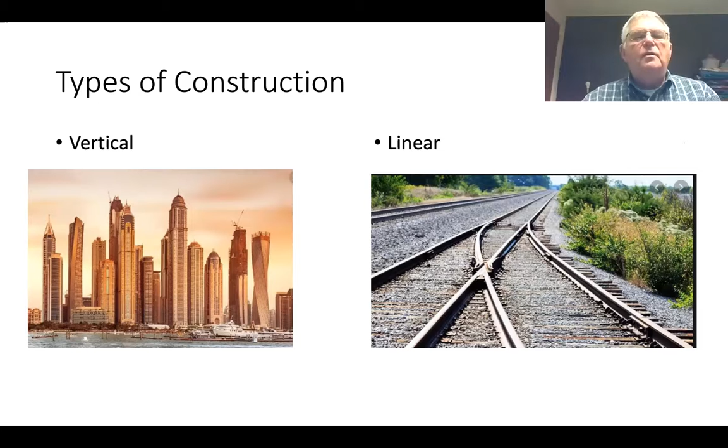You can basically divide the types of construction into two different categories. Vertical construction, which buildings are an example, and this is a slide, I think, from Kuwait, one of the places in the Middle East, and linear: roads, railroads, that sort of thing that go horizontal. So vertical and linear. Let's go into some examples. This is a very unusual bridge, and it's mostly what you would classify as linear construction.

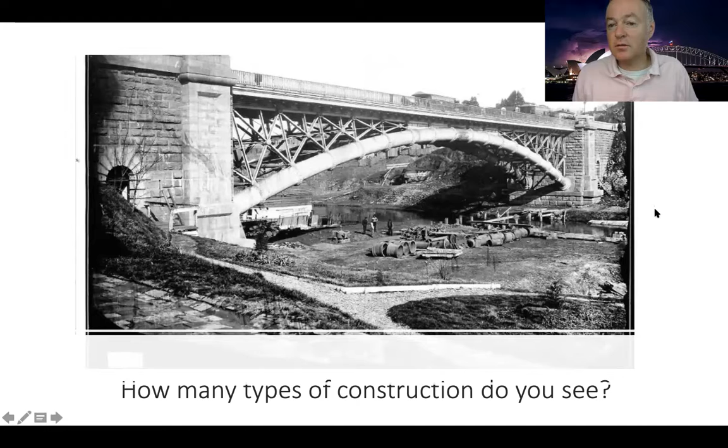It's quite an interesting structure. So anyway, this is a good example of linear construction. The bridge, the pipeline, the roadway on the bridge would kind of typify that kind of work. So Bill, another way to think of linear might be horizontal. Yeah, horizontal, linear, as opposed to vertical. Right. Yep. Okay. Very good. Okay, next one.

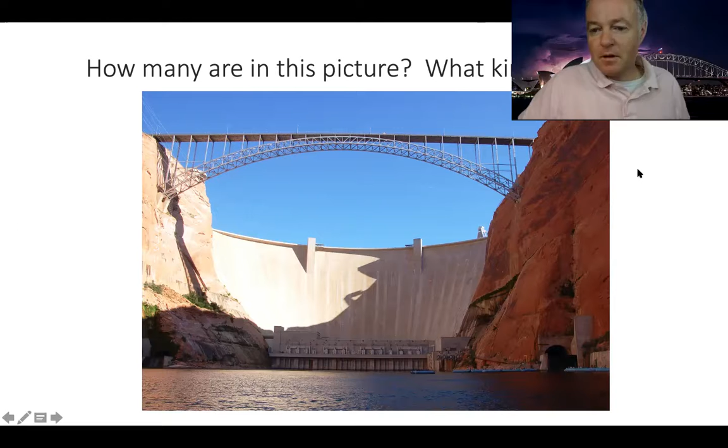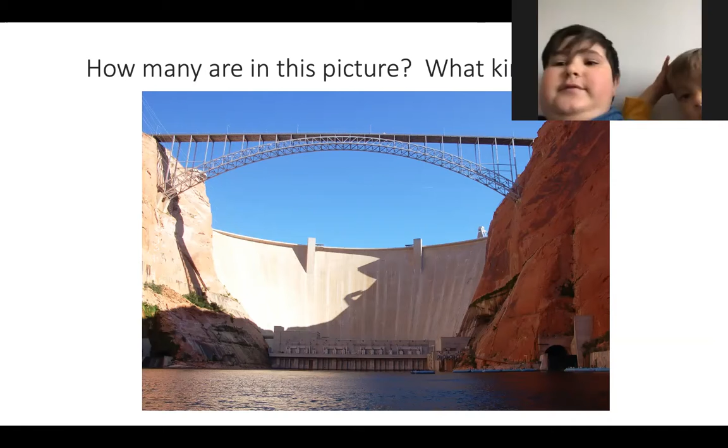I'm guessing that the aqueduct or whatever it's called across is lineal, and then the dam is up. I forget what that's called. Vertical. That's vertical. Yeah. Very good. The roadway up on top, is that vertical or linear? That looks vertical to me. Well, the roadway is going horizontal, right? Yeah. And the dam is going up and down.

Down in the lower right corner, you can barely see it in the shadow. There's a tunnel. I see it. Yeah. And would that be linear or vertical? Vertical. I think it's linear because it goes parallel to the ground, okay? The tunnel is actually an emergency spillway. If the water level gets too high on the dam, they don't want all of the water spilling over the top of the dam. And so there's like a valve, a big sluice gate that will release the water and it'll come pouring out of that tunnel.

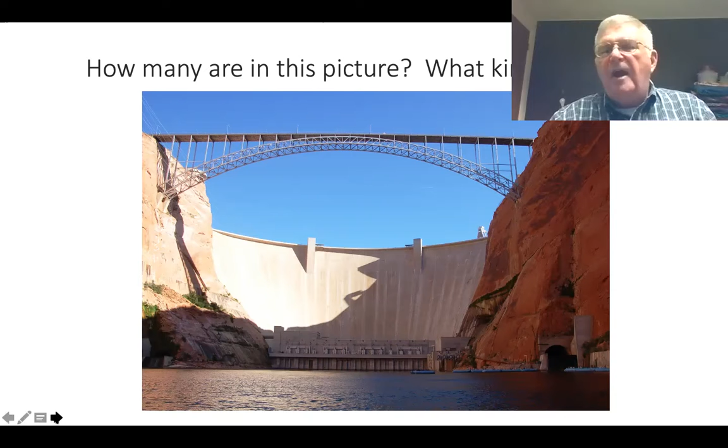So I imagine if you're in a rubber raft going down the Colorado River like we were, that would give you quite a ride. Okay, on to other stuff.

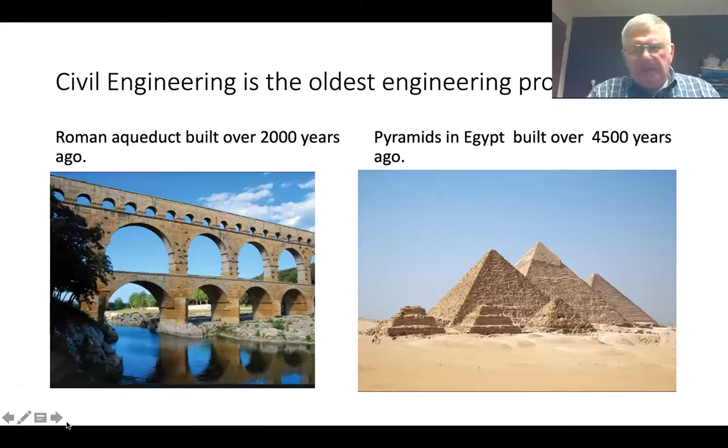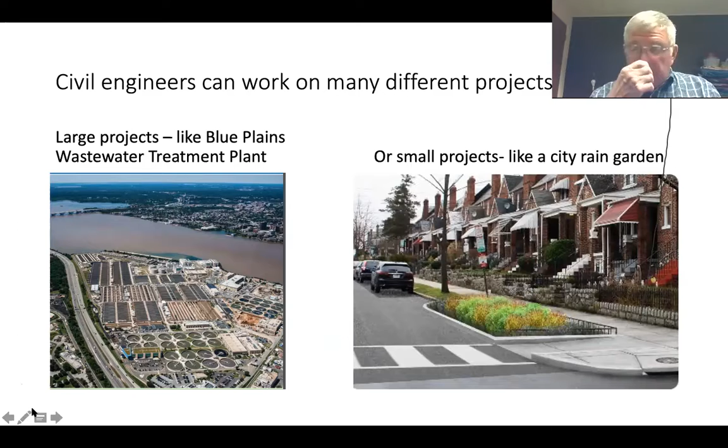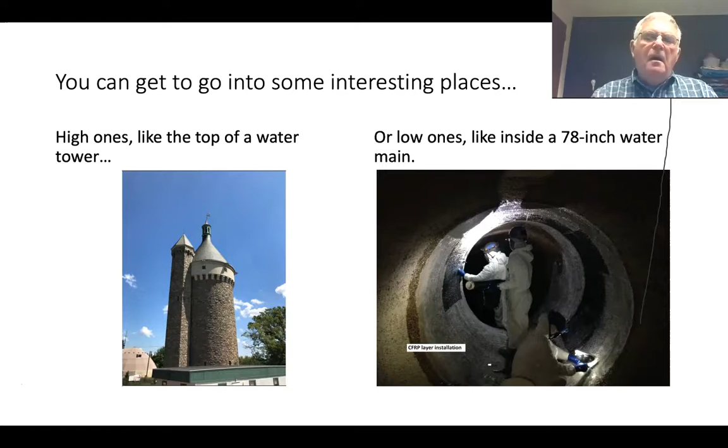Bill, I think Scott has a question. Yeah, what's up? So what was your favorite project that you were ever involved with? I think probably we'll be looking at one of them that was pretty interesting. I've got a couple of examples of what I've been doing, but one involved a radio tower, and the other one involved a pipeline crossing the Potomac River on a bridge, and we'll get to that toward the end.

Okay, we've got to take our work very seriously. Back in 1750 BC, about 3,750 years ago, there was a Babylonian king, I think he was in Assyria, and his name was Hammurabi. He came up with a bunch of laws to govern his kingdom, and one of the laws had to do with engineering. What he said was that if a builder builds a house for someone and does not construct it properly, and the house which he built falls in and kills the owner, then the builder shall be put to death.

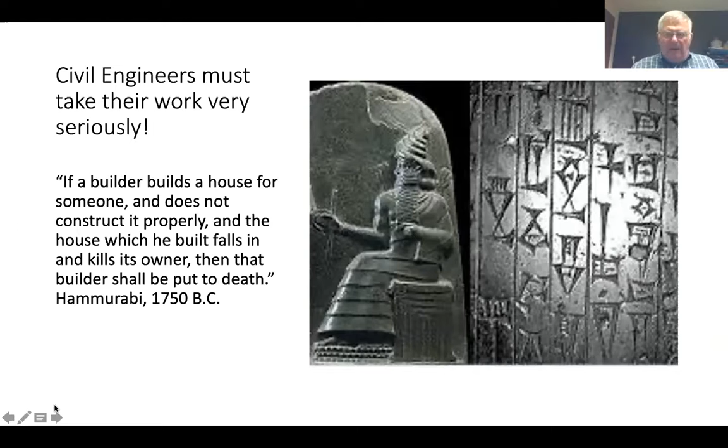Okay, alright. How did I get involved with civil engineering? What did I do? Why did I want to become one? This goes back to my dad and my grandfather, and these were all guys that were carpenters. I am about the first in 5 generations that was not a carpenter. But I was always interested in construction, and I've always been around construction.

Back when I was, I guess, probably my first year in college, during my semester break, I helped my dad build a house. It was in the middle of winter. It was freezing. I was up in the Boston area, and the lumber for the house had come down from Canada, and the lumber was all frozen.

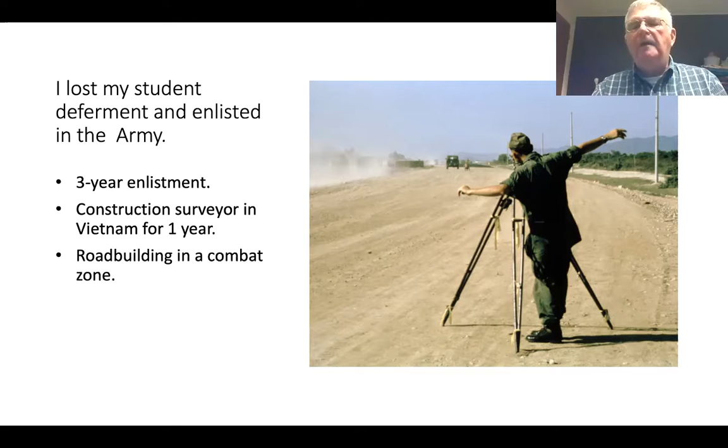I was in Vietnam for a little over a year. This guy waving his arms isn't me, but that's a typical construction surveyor on QL1, the main coastal highway in Vietnam, which we were rebuilding. That was the road I worked on. Like I say, it's not me, but it was one of my guys.

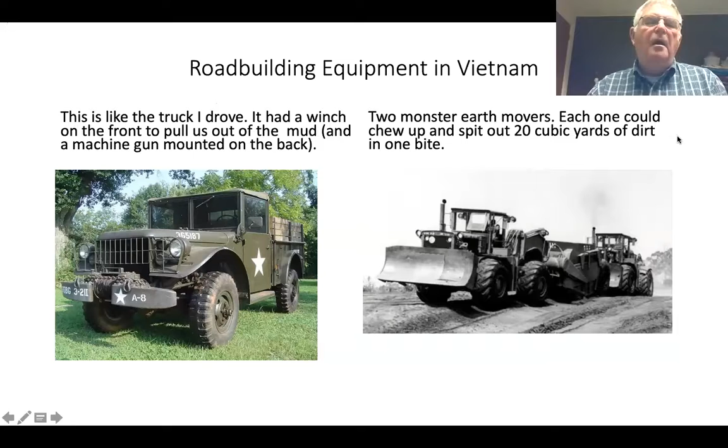These are some of the vehicles we had in Vietnam. The left-hand side is an M37, what they call the weapons carrier. It's a 3/4 ton, 4x4 truck with a 100 horsepower engine, and it had a winch on the front - you can see it in the front bumper. If you got stuck in the mud, it had a cable you could wrap around a tree and pull yourself out with the winch.

For a time, we also had a machine gun in the back of the truck. That was for the fellow that I replaced when I arrived in Vietnam. He had been riding in a truck like this when it was hit by a B-40 rocket, which blew the truck up - he was horribly injured and sent back to the States. Another fellow riding in the truck was shot in the wrist, was treated in the local hospital, and came back working for me on the road. So we had a machine gun mounted on the back of the truck just for our protection. We never had to fire that machine gun in anger at anyone, so that was good.

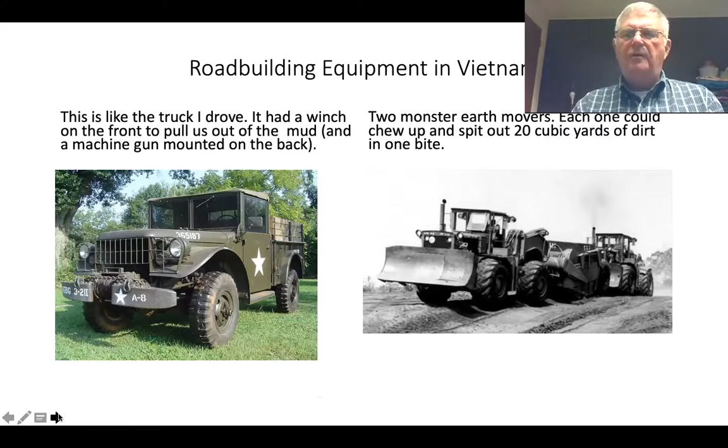Anyway, we finished the road. I came home, served another year in the Army, and then went to school again. This time I was able to get into George Washington University, and since I had credit from Wentworth, I transferred it over and took advanced calculus, physics, and hydraulics. Hydraulics is the study of fluids - water is a fluid, air is a fluid, believe it or not, along with different kinds of liquids. The reason we study them is to know how to design pipelines to carry the fluids, which is important for civil engineers.

We studied water and sewer design and soil mechanics. Well, soil mechanics, that's dirt, right? How do you think engineers use dirt? Do you have any idea?

Anyone? I might call on someone - Bill. We could call on Jailer, or who else is online here? Scott, Miles, Cyrus, anyone? Who would want to analyze dirt? Miles says gardens. Well, yeah, but soil mechanics is more physics than it is biology.

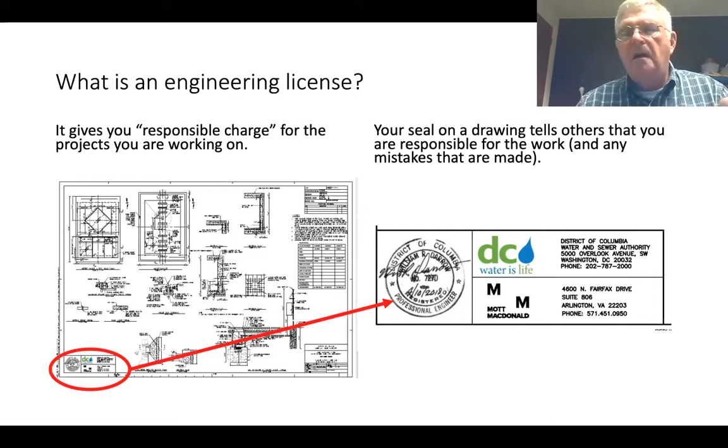With that, they give you a seal, and this is my wet seal, the thing on the right. You stamp the drawing and say, all right, everything is here, is designed well, it's okay, and you can send it out for the contractors to build.

My projects: I was an inspector on a school job. That school, I learned, has since been closed. This was like 40 years ago that school was built.

Radio towers, a 500-foot radio tower. This is Google Street View, so the picture is kind of warped. Looks like both radio towers are leaning over, but actually they are straight. Mine is the skinny one on the left, that's 500 feet high.

The contractor that put that radio tower up had to fly the top 100 feet or so in with a helicopter. That was quite a show.

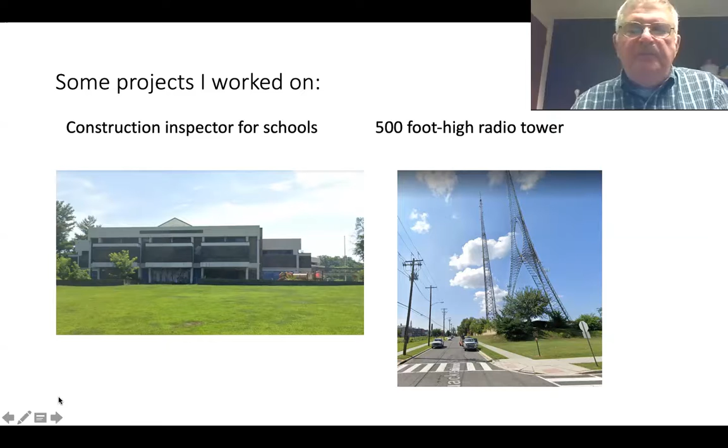It was an interesting project. It took about 3 months to put up, and it took about a week to tear it down afterwards. But anyway,

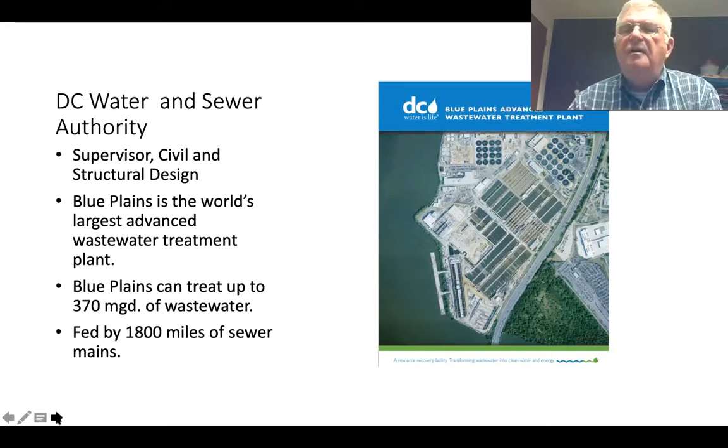But it also generates methane gas. The methane gas is used to drive steam turbines that provide electricity, and so they have a plant that produces electricity for running the wastewater treatment plant. So it's kind of an interesting renewable resource.

On the clean water side, when I came to Mott MacDonald, we are in charge of the city's drinking water system. Bryant Street pumping station is a huge pumping station, which is like the heart of the water system, literally the heart, because it's connected to all of the water pipes in the city. And so the pumping station pumps water to all of the residences and the buildings in the city.

Tank number 2 is a 1 million gallon water tank. We have to go in there and inspect it every 3 years. There's a ladder that goes through and you can go in a hatch inside. Sometimes they can't take the tank out of service, and so what they do is they launch a small submarine. And the submarine swims around in the drinking water supply, and you can get videos of the condition of the tank inside.

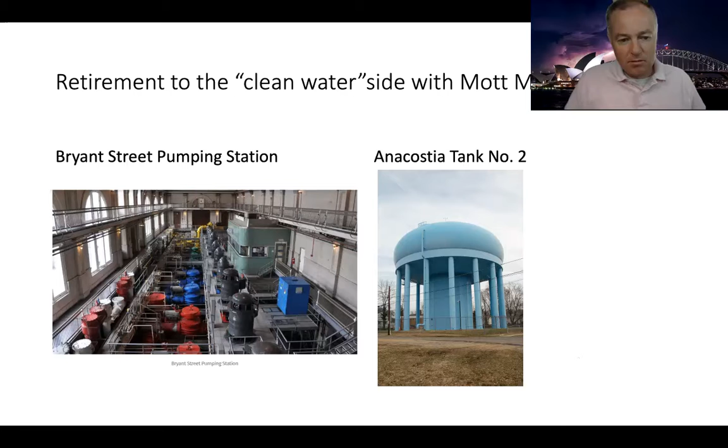Bill, a question. The red and the blue round cylinder things there, what's the big difference there? Okay, those are big electric pumps, and the city has what they call different pressure zones, and if you live at the top of a hill and the pumping station is down at the bottom of the hill, you have to pump the water up in order to get enough water pressure at the top of the hill.

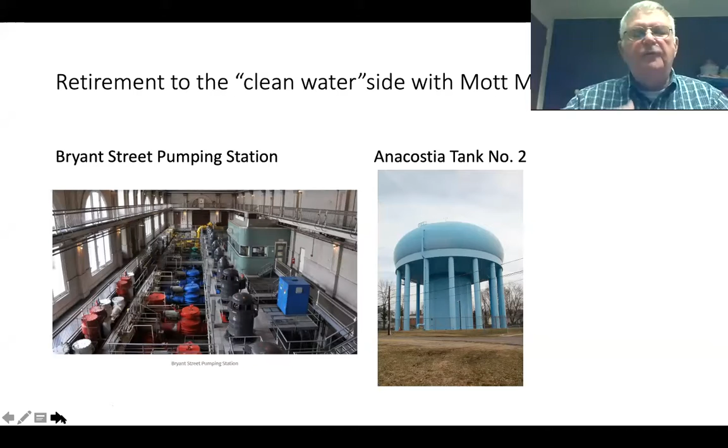If the buildings are down at the bottom of the hill and the pumping station is up near the top, you could put enough pressure in the pipe to burst the pipe. There's too much water pressure at the bottom of the hill, not enough water pressure at the top of the hill. And so they divide the pressure up into different stages so that you're not breaking pipes all over the city.

So the red is first high service, the blue is low service, and so on. They have different color codes for the pipe.

Okay, lost the slide. Yeah, I just wanted to, I'm not sure how many slides are left, Bill, but I wanted to give an opportunity to see if anyone had any questions. Oh, yeah. I think Cyrus might have a question here. I knew he'd ask this question. Cyrus, do you want to have a go? Hello, Cyrus.

I'll ask for you. Do you work with filtering out PFAS and chemicals that are in the water? The water filtration plant, it's kind of interesting in Washington. The water filtration plant, which Montgomery Meigs built back in the 1800s, that's run by the Corps of Engineers, and they have a filter plant way up in Dalecarlia, which is the north part of the city. They take the water out of the Potomac River, and they run it through filter beds to filter out the impurities in the water.

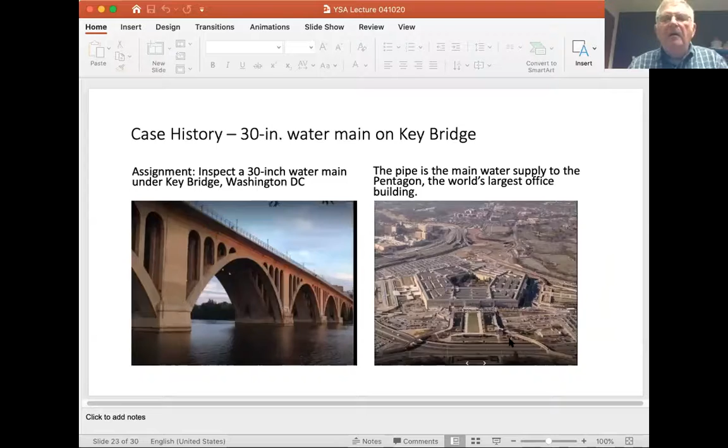Back one slide, Rob. Well, actually, you want to go one slide? No, one more. Oh, it's coming towards over an hour. So would it be okay if we just did this last one?

Yeah, okay. One of the interesting projects that we worked on was on Key Bridge. There was a pipeline that went across Key Bridge, and it supplied water, well, it still does, to the Pentagon. The Pentagon is the largest office building in the world. And during the terrorist attack on 9/11, the terrorists flew an airplane into the Pentagon to try to kill a whole bunch of people. Well, they did. But it caused a tremendous fire.

And a huge amount of water was necessary to put the fire out. This surge of water created a huge force in the pipeline on the Key Bridge. We had to inspect that pipe, and we found that it had done some damage to an anchor for that pipe. And so, number one, we were able to determine that it was caused by this terrorist attack by running a hydraulic model,